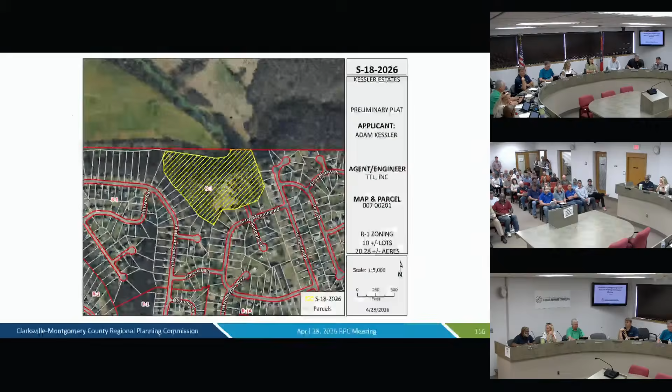Our first case on the consent agenda is case number S18, 2026. The request is for preliminary plat approval of Kessler Estates Cluster. The zoning is R1, 10 lots are proposed, and the recommendation is for deferral.

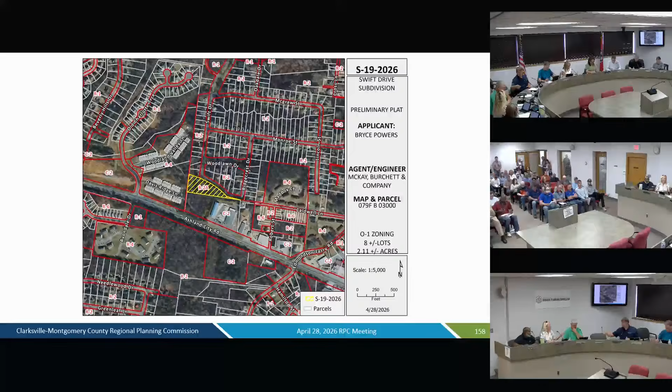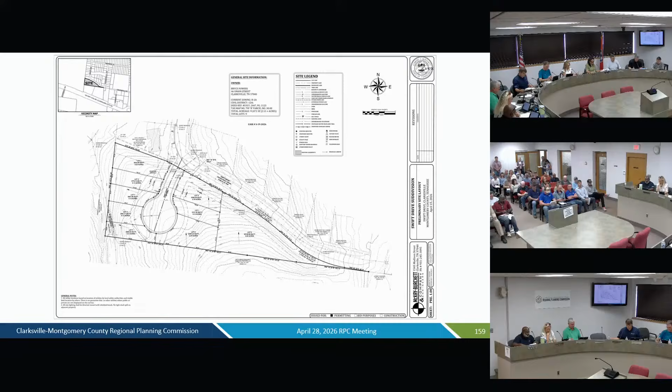Case number S19, 2026. The request is for preliminary plat approval of Swift Drive subdivision. The zoning is O-1, 8 lots proposed, and the staff recommendation is for approval subject to the conditions listed. Case number S20, 2026. The request is for preliminary plat approval of Gold Landing, Section 2. The property is zoned R3, and the number of proposed lots is 69. Staff recommendation is for approval subject to the conditions listed.

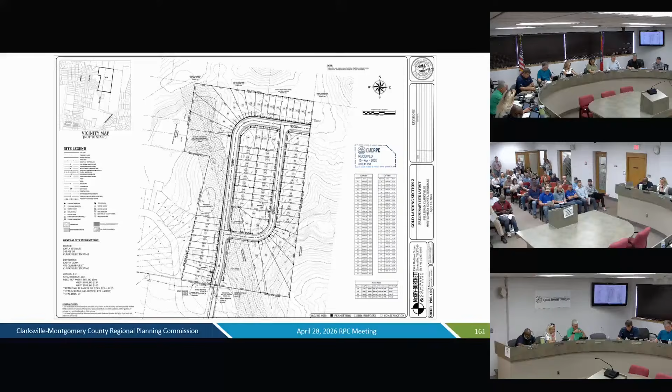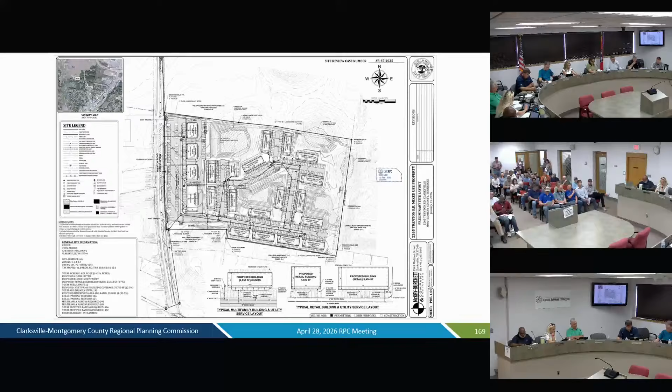Case number SR 87, 2025. The development's 2265 Trenton Road mixed use. The zoning is C5. The proposed use is retail and multifamily, and the recommendation is for deferral. Case number SR 9, 2026, Banner at Ajax. The proposed use is apartments. The zoning is R4, and the recommendation is for deferral.

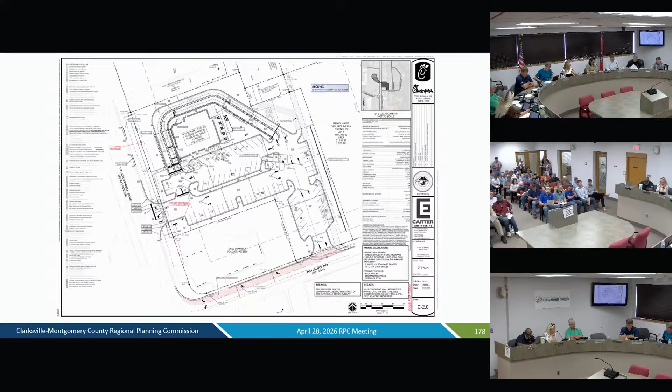Case number SR 11, 2026, the development is CFA 06163 Fort Campbell. The proposed use is commercial restaurant. The zoning is C5, and the staff recommendation is for approval subject to the conditions listed. Case number SR 30. The development's called 1662 Golf Club Lane. The proposed use is professional office. Zoning is OP office, and the staff recommendation is for approval subject to the conditions listed.

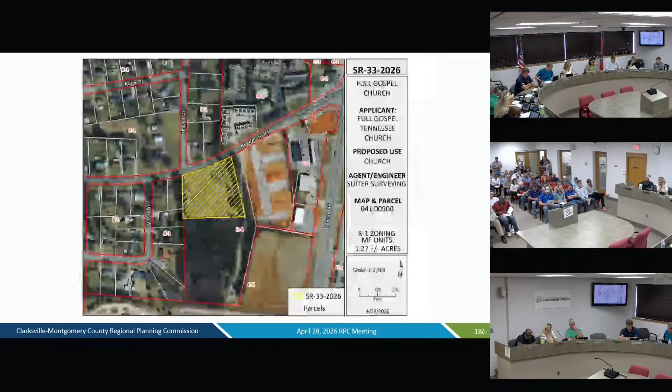Case number SR 33, 2026. Development is Full Gospel Church. Zoning is R1. Staff recommendation is for approval subject to the conditions listed. Case number SR 34, 2026. The development is Black Dog Storage. Proposed use is warehouse. C2 commercial is the zoning, and the staff recommendation is for approval, subject to the conditions listed.

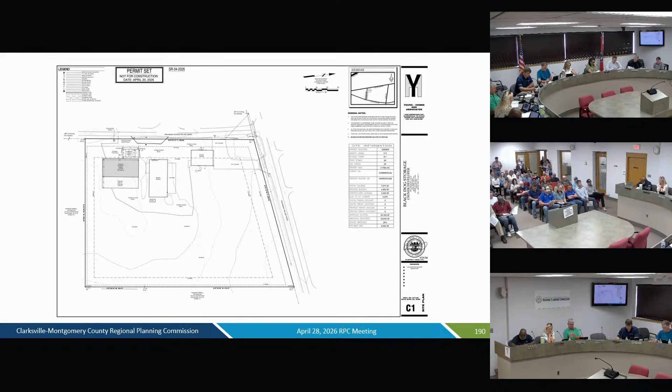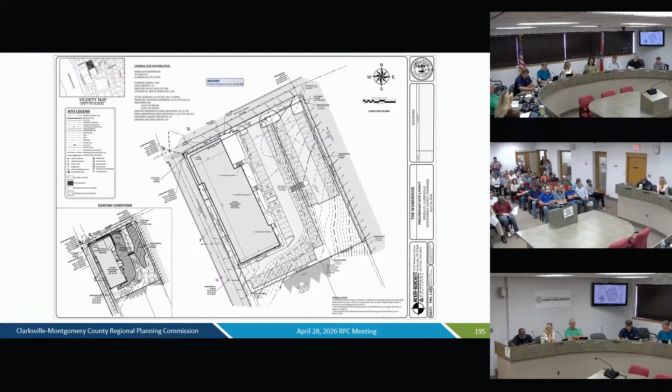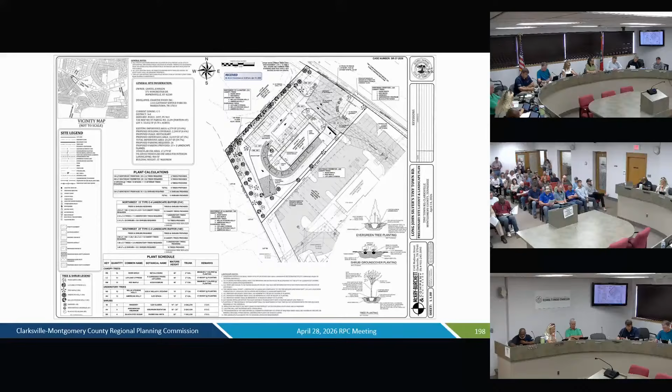Case number SR 36, 2026. Development is called the warehouse. The proposed use is retail and office. The zoning is CBD, Central Business District. Staff recommendation is for approval, subject to the conditions listed. Case number SR 37, 2026. The development is called Long John Silver's, Tiny Town Road. Proposed use is restaurant. Zoning is C5, highway, arterial, and commercial. Staff recommendation is for approval, subject to the conditions listed.

SR 38, 2026. The development is CarMax, Clarksville. The proposed use is used auto sales. Zoning is C5, highway and arterial commercial. Staff recommendation is for approval, subject to the conditions listed.

Case number SR 39, 2026. Development is McCoy Group, Clarksville. The proposed use is heavy equipment dealer, zoned C5. Staff recommendation is for approval, subject to the conditions listed.

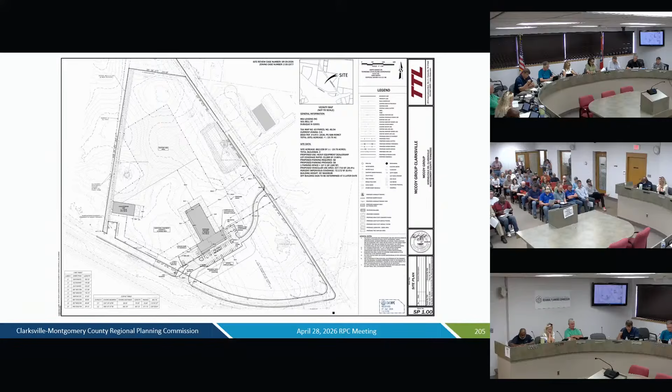Finally, case number SR 40, 2026. The development is River Road Commercial. Proposed use is a contractor's building, zoned C2, general commercial district. Staff recommendation is for approval, subject to the conditions listed.

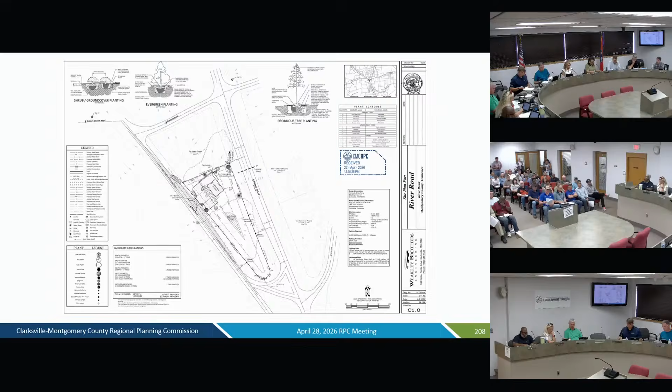Thank you. All right, commissioners, you heard the list of items. Do any of you need to remove any of those from the consent agenda?

Is there anyone from the public who needs to remove any of these from the consent agenda for individual hearings? Show of hands. All right, Madam Chairman, we'll consider the consent agenda as read, and we'll just need a motion on the consent agenda.

Do we have a motion? I make a motion for approval on the consent agenda with the conditions proposed. Second. I have a motion properly seconded. All in favor? Aye. All right, that motion has passed.

Believe that. That's good stuff.

This is where you read your little zoning. So I'm going to go ahead and give some preemptive remarks.

This portion of the agenda is for zone change applications. We will conduct the hearing for the remaining cases today on the agenda. For each of the cases, we'll allow up to 3 speakers to speak in favor and 3 speakers to speak against or oppose, and each will have 3 minutes. Then there will be an opportunity for rebuttal if necessary, also for 3 minutes.

Please keep in mind, any votes today are on the zoning commission's zoning applications, or for recommendations. If you want to follow through with the recommendations we send, please go to the city council or county commissioner meetings that I stated earlier, so you can follow through with your application and see if there's any changes there. But we are just the recommendations. So thank you for your patience with us.

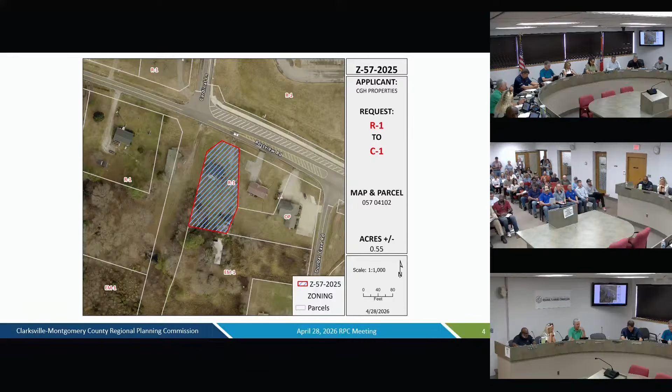It is in the St. Bethlehem planning area. And the reason for the request, as stated by the applicant, is rezoning this lot for neighborhood commercial to serve neighborhood and nearby residents.

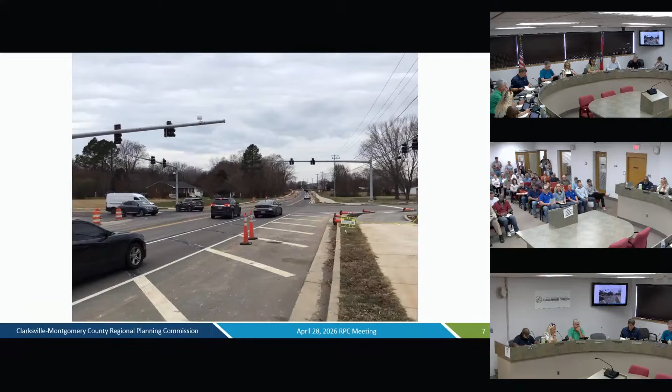You'll see the department comments received in reference to this application. They've stated no gravity sewers available, would be force main only. The city street department stated it's below the threshold for a traffic assessment, and the access would be determined by ordinance, which is one access on Dunbar Cave Road.

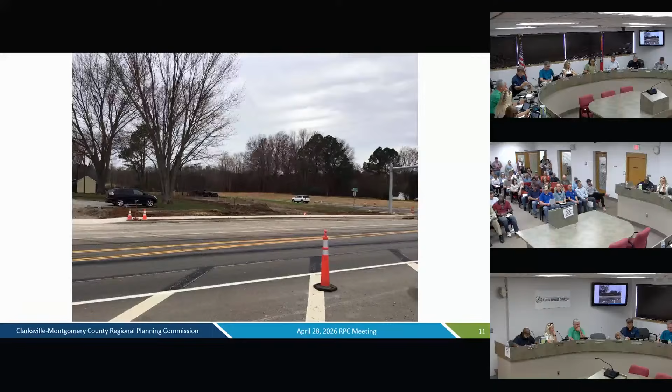I see no other department comments of any specific concern. The request, as stated, is in the St. Bethlehem planning area. Future land use is neighborhood commercial.

The staff's recommendation is for approval. The request is consistent with the overall goals and objectives of the adopted Clarksville-Montgomery County Comprehensive Plan. The parcel is designated neighborhood commercial on the adopted land use opinion map. This designation is intended to serve surrounding residents by providing small-scale neighborhood-oriented goods and services, and the proposed C1 neighborhood commercial zoning designation aligns with the future land use designation identified for this parcel.

You have 2 zoning maps showing the aerials and the zoomed-in copy of the property in question. You have a future land use opinion map and the current zoning for the area.

You do have some comments that were received in reference to this application. They're shown there on page 9 and 10, I believe. If this is familiar to you, this was here roughly 3 months ago, originally proposed as R3, and it was remanded back at the city council to consider a different zone, and at this point in time, the applicant has changed to C1.

So if you have any questions for myself or the staff, I'll be more than happy to try to answer them for you. Are there any questions? Okay, do we have anybody in the audience that supports this zoning?

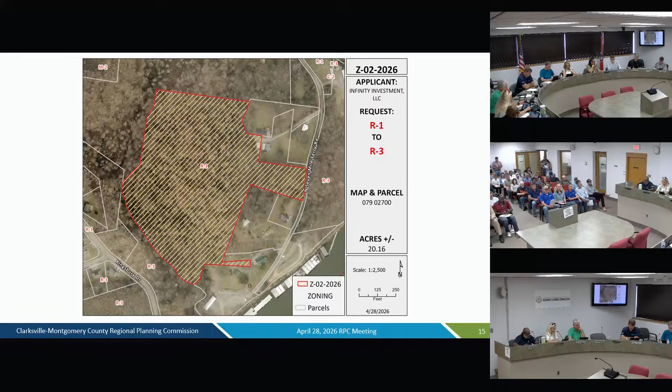Commissioners, your next application is Z2 2026, the application of Infinity Investments LLC. The request is to go from R1 Single Family Residential to R3 Three Family Residential for a property located on the western frontage of 7 Mile Ferry Road, approximately 1,450 feet south of the intersection with Pumping Station Road. It's a tract with areas of steep to moderate topography, currently wooded, and is in the South Clarksville planning area.

The applicant's statement for proposed use is to provide affordable housing on this property. The extra density would help with some topographical challenges and would be an extension of the existing R3 zones immediately east and west of this lot, connecting the two R3 areas. Again, that's the applicant's statement.

Department comments have stated there's no gravity sewer and a possible off-site lift station upgrade would be required. The Clarksville Street Department indicated a traffic assessment was required due to the proposed zoning acreage, and it was received and in compliance with the traffic study guidelines. The report is available for additional details. The impact would be increased residential density.

Residential development estimates by the applicant is 74 units. Historic is 100 units. That historic yield is likely high due to the topography. Again, it is in the South Clarksville planning area. Future land use designation is suburban neighborhood, and as previously presented, the staff's recommendation is for disapproval.

This request is inconsistent with the overall goals and objectives of the adopted Clarksville-Montgomery County Comprehensive Plan. The future land use opinion map designates these parcels as suburban neighborhood. Large areas of R3 moderate density residential within this designation do not fully reflect the intended development pattern for the area. The South Clarksville planning area and growth and development framework section of the Comprehensive Plan discourage development on steep slopes due to increased risk of erosion, higher construction costs, and other safety factors.

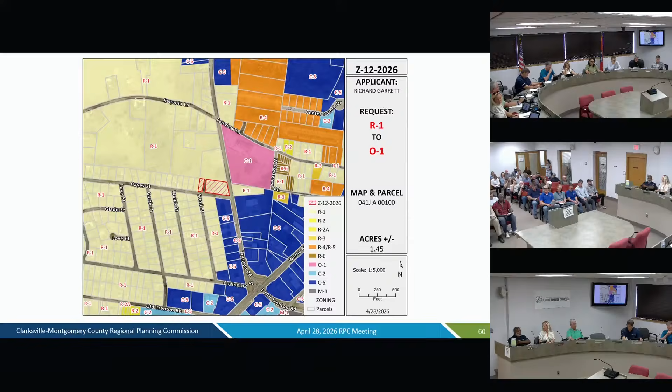The proposed O1 zone is intended to provide a limited office-only use that is compatible with the surrounding development patterns while minimizing impacts related to traffic, drainage, flooding, and infrastructure. Again, those are the comments of the reason for the request by the applicant.

The department comments: Utility has stated possible off-site lift station upgrades required. The street department has stated no future connection to Trenton Road, and a drainage plan may be required at the development stage.

The impact of the proposed use on the surrounding development: O1 provides an opportunity for general professional business offices of various scales and levels of intensity. It is accessible from Hayes Street. I did mention the karst topography.

There is a sinkhole immediately adjacent to this site. It is in the St. Bethlehem planning area, and the future land use designation is urban neighborhood.

Staff has recommended approval. The reasoning for this request is the proposed O1 office district aligns with the future land use designation of urban neighborhood, which states that limited office and commercial uses primarily located on major roads are appropriate, according to the adopted Clarksville-Montgomery County Comprehensive Plan.

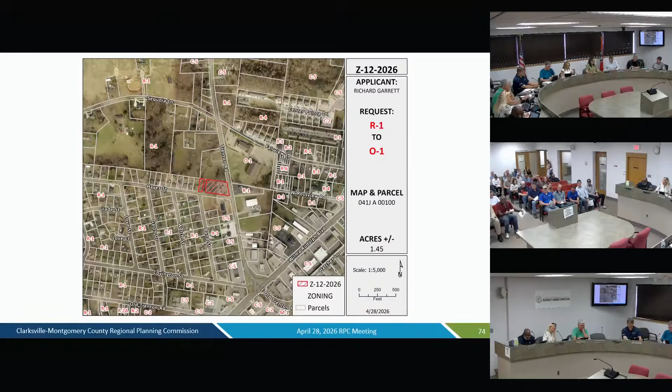Commissioners, on page 54 is your next application. Raul Lozano is the agent or the owner. The request is to go from RM1 single family mobile home residential district to R4 multiple family residential district. This is along the eastern frontage of Center Road, 180 plus or minus feet south of the intersection with Britton Springs Road. The reason stated by the applicant is to match the zoning across the street and it will be used for a multifamily residential structure. This request encompasses 0.35 plus or minus acres.

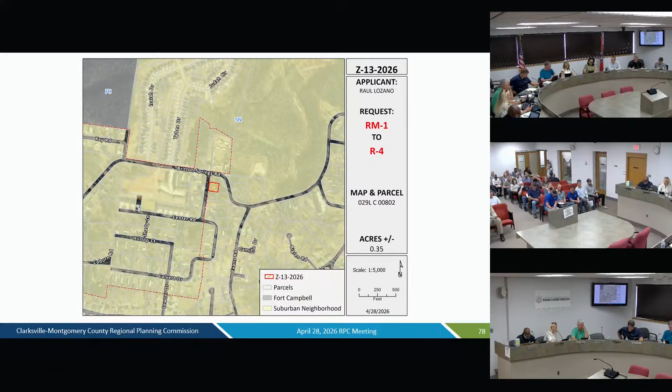It's an existing residential mobile home lot in the Lafayette Peters Mill Road planning area. There is previous zoning history in reference to this application. A year ago, both staff and the Planning Commission recommended approval of this application.

I believe it got first reading at City Council and was disapproved on the second reading. You have no department comments of any concern. The street department did indicate drainage and water quality may be required at site review. The impact would be increased multifamily residential density, accessible from Center Road. Total historic lot yield would be 4.

It is in the Lafayette Peters Mill planning area. There was also the Britton Springs neighborhood plan that was not adopted by City Council. Future land use map indicates suburban neighborhood. Staff recommendation is for approval.

The request is consistent with the overall goals and objectives of the adopted Clarksville-Montgomery County Comprehensive Plan. This parcel is shown as part of a suburban neighborhood future land use. While predominant use is moderate density single-family residential, this request is adjacent to a new multifamily residential development, replaces aging housing stock, and increases housing options in the planning area without negatively affecting the character of the area. It is encouraged to maintain a desirable mixture of housing stock for the planning area as well.

Your next two slides are the aerial overviews of the property in question. Then you have the future land use opinion map for this area, and the current zoning map. I do think it's relevant for the discussion. You'll see the dashed line — that is the location of the city limits boundary, and it does follow Center Road center line at this location. If you have any questions, I'll be more than happy to try to answer them.

Why City Council? Hit your button. I know, why'd City Council turn it down on the second reading?

I believe this was brought up when we were first discussing, after the first meeting of the Britton Springs Road neighborhood plan. Though it got through first reading by, I believe, a vote or two, it was pulled at second reading and it failed 7-6. So one or two council members changed their vote between first and second reading, possibly due to having some of those meetings and saying let's wait till the plan's done. Ultimately, as we know, the plan was not adopted, so the applicant decided to come back in and try again this year. And what was our vote on that, our commission vote?

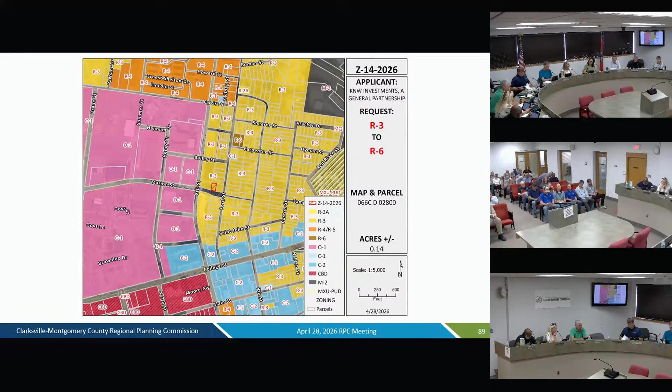All right, commissioners, on page 61 is your next application. It is Z14-2026, KNW Investments, a general partnership, requested to go from R3 three-family residential district to R6 single-family residential district. This is along the northern frontage of Marion Street, approximately 153 feet west of the intersection of Ford Street. The reason for the request stated by the applicant is to build two new houses on a currently vacant property, and that the request is in line with the Red River District Study. Again, those are the comments from the applicant as to why they're requesting this rezoning. This request encompasses 0.14 plus or minus acres.

It encompasses a former or existing single-family residential lot and a former alley that was abandoned. It is in the downtown urban core planning area. There were no department comments of any concern in reference to this application. The impact would be increased single-family residential density.

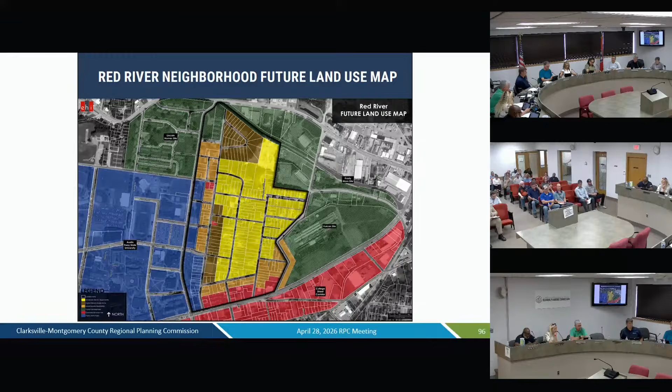Accessible by street frontage of Marion Street. The applicant's estimate and the historic estimate would be 2 lots. Again, this is in the downtown urban core planning area, the comprehensive plan, and a portion of the Red River neighborhood plan. Future land use designation is the comprehensive plan urban neighborhood and what is determined to be mixed density residential in the Red River neighborhood plan.

The staff is recommending approval. This request is consistent with the overall goals and objectives of the adopted Clarksville Montgomery County Comprehensive Plan and the Red River neighborhood plan. The R6 single-family residential request aligns with both the urban neighborhood and mixed residential future land use designations of the aforementioned plans. Small lot single-family residential development is identified as appropriate for this location by the adopted Red River neighborhood plan, and it is encouraged to maintain a desirable mixture of housing stock for the planning area.

You do have the 2 aerials of the property in question. Then you have a copy of the comprehensive plan future land use designation, the current zoning map designation. The Red River plan is on the screen, and the Red River neighborhood plan was in the online presentation or the screen presentation you have there. If you have any questions, I'll be more than happy to try to answer them.

Commissioners, do we have any questions? Okay, we're going to go ahead and move into public hearing. Do we have anybody for Z14 2026? Anybody against Z14 2026?

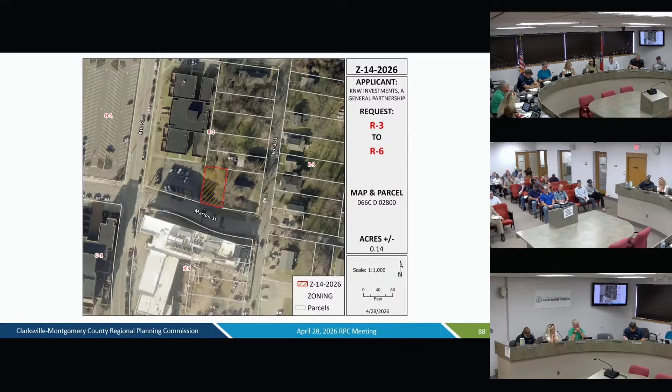I make a motion for approval due to the request being consistent with the overall goals and objectives of the adopted Clarksville-Montgomery County Comprehensive Plan and the Red River Neighborhood Plan.

I will add, if you have any questions, you're welcome to reach directly out to me. I'll be more than happy to answer anything and sit down with you and go over that survey. You're welcome. Thank you for being here today.

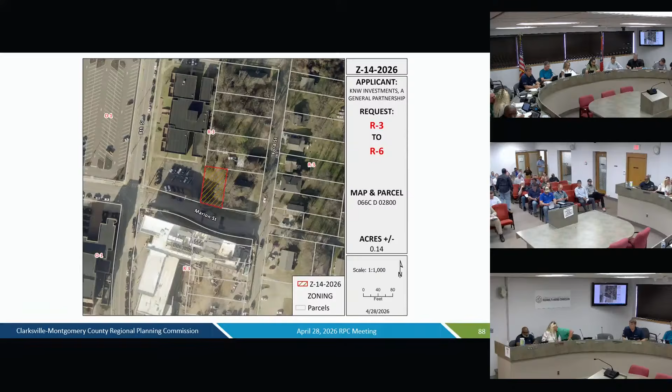Commissioners, your next application.

Please bear with me, I decided to scroll all the way back to the beginning, it appears. I hit the wrong bookmark, is what I did.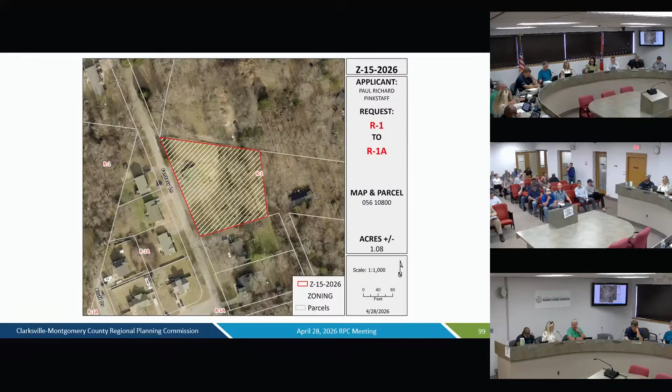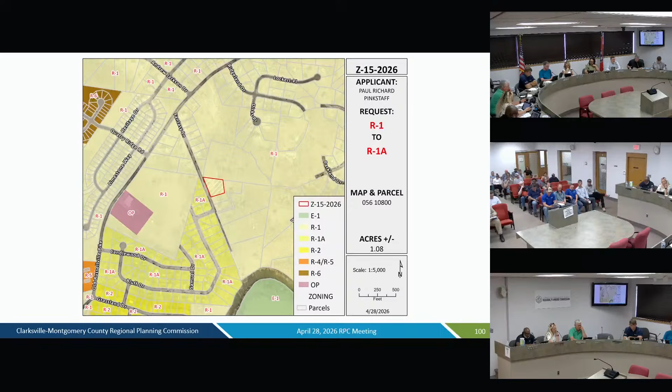All right, your next application is Z15-2026, starting on page 68 of your staff report. It is the owner, Paul Richard Pinkstaff, requesting to go from R1 Single Family Residential District to R1A Single Family Residential District. It's for a property that fronts on the east frontage of Fantasy Lane, approximately 325 feet north of the Fantasy Lane and Candlewood Drive intersection. The reason stated by the applicant is they're requesting R1A as an extension of the adjacent properties from the west. This property will also be used to build three single-family homes. Again, that's the comments of the applicant for this application.

This request encompasses just over an acre at 1.08 plus or minus. It's currently a single-family residential home site. It is in the St. Bethlehem planning area. This was originally requested a year ago from R1 to R3. Both staff and the RPC recommended disapproval, and the City Council did disapprove that application.

Department comments indicate possible water main upgrades required if a hydrant's required. CDE has denoted a property line that would need to be relocated or an easement given. You do have some school system comments, and the impact would be increased single-family residential density. The applicant's historic estimate and the historic estimate for that zoning classification is 3 lots. It is in the future land use map designation of suburban neighborhood.

The staff is recommending approval. This request is consistent with the overall goals and objectives of the adopted Clarksville-Montgomery County Comprehensive Plan. The R1A Single Family Residential District aligns with the suburban neighborhood designation identified for this tract, and the request is located in an appropriate location for a gradual increase in density that is in character with the development pattern for the area. The proposed R1A zoning classification is a gradual transition from the R1 standards of 15,000 square feet and 90-foot lot width to R1A's 12,000 square feet lot size and 80-foot lot width. These types of gradual increases align with the growth principles of the adopted Comprehensive Plan.

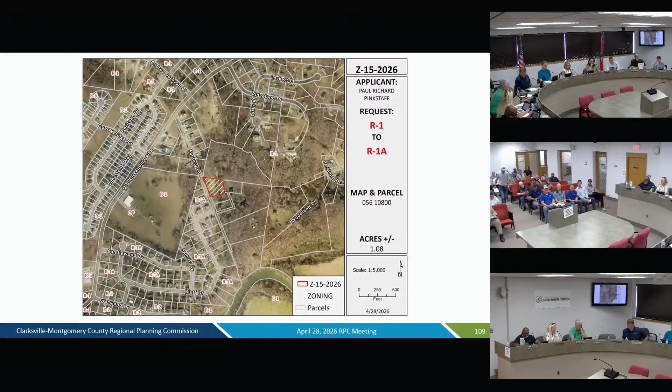Okay, we're going to go ahead and go into public session. Is there anyone who is for Z15-2026?

Please state your name and address. David Blessing, 895 South Ridge Trail. So what we're trying to do with this property is build 3 single-family homes. The current zoning allows for 3 single-family homes with a flag lot as well. But going from R1 to R1A allows for a narrower lot, going to an 80-foot lot, and allows me to align all three homes on the front setback to match the adjacent properties as well. That's all I have. If you have any questions?

Thank you. All righty, thank you Mr. Blessing. Is there anyone else for this zoning? Is there anybody here against it?

Yes, ma'am. When you come up, please state your name and address. Stephanie Fullerton, 456 Bluff Drive.

The rezoning request to go from R1 to R1A, the applicant is intending to place 3 separate single-family structures on one lot. While labeled as single-family, this functions as a multi-unit development in every practical sense. Fantasy Lane is a traditional single-family neighborhood, 1 home per lot. That pattern is consistent across the zoning map. Allowing 3 units on 1 parcel breaks that pattern and sets a precedent that will be impossible to contain. Once one lot is intensified, others will follow.

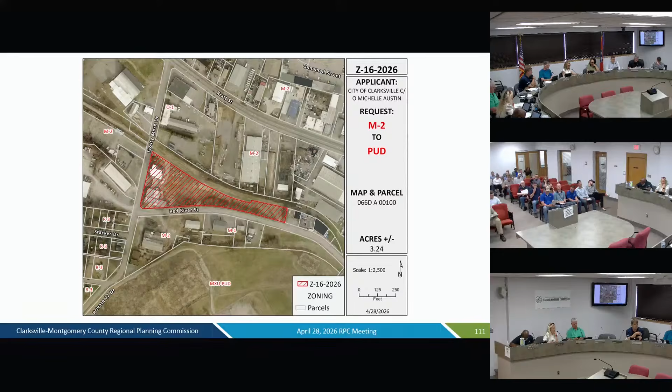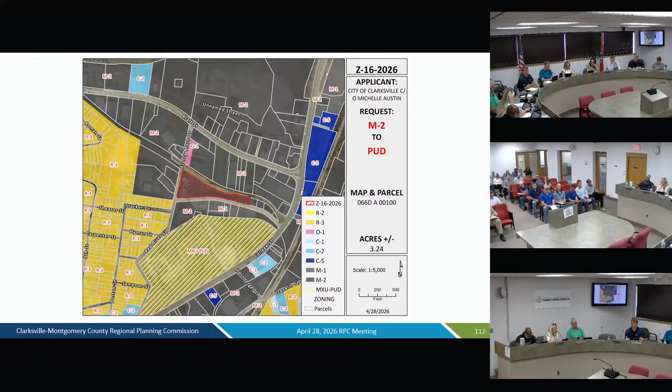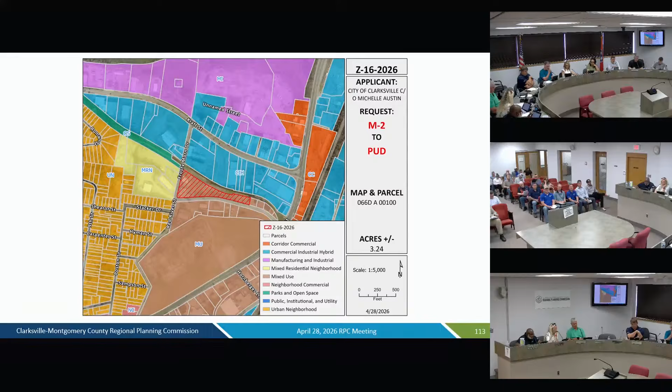This request does encompass 3.24 plus or minus acres. As you will see in the report, there is a detailed reason for this request as part of the PUD report, so I won't state it redundantly, but I'll go into the report for you. The request is right at 3 1/4 acres, currently zoned M2. This has been referred to many times over the years as the Frosty Morn site. It's a former industrial food processing facility currently in a state of disrepair. It is in the downtown urban core planning area.

Department comments: we do have pre-application meetings prior to these submittals. This has been met with all departments at the pre-application meeting, and then again the opportunity to provide the following comments. Street Department has indicated that drainage and water quality plans may be required. Dumpster tied to sewer and improvements to the storm sewer on Red River may be required.

Clarksville Fire Rescue indicated that the standpipe would be required for this project, and a future code-compliant hydrant location will be requested to serve the standpipe within 100 feet of the FDC, that's an acronym for Fire Department Connection. And then there were school system comments as well.

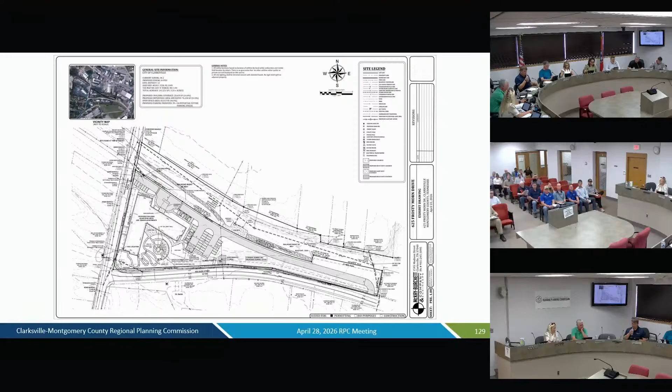All PUD applications, as a reminder, if this does receive approval at City Council, the Regional Planning Commission will have an additional opportunity to do a final PUD plan. I can tell you the comments referenced there will be addressed at that point in time. And actually, the site plan has already been updated to accommodate the FDC location for the fire department.

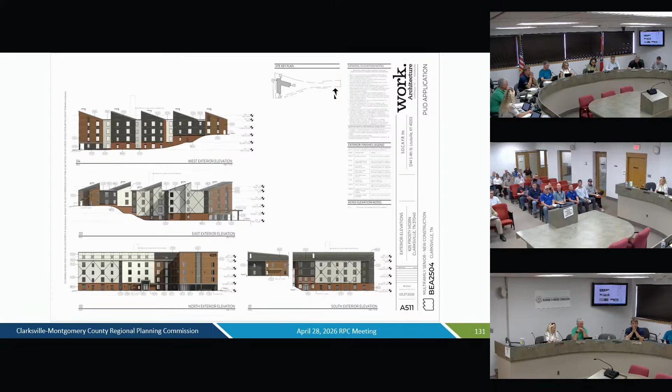There is no historical estimates in reference to this because it's specific to the plan that's been submitted. The applicant has indicated 65 units. Again, it is in the downtown urban core planning area. The future land use designation is for mixed use, and staff's recommendation is for approval of the preliminary PUD plan. You've got the aerial photographs, the future land use designation, the current zoning, and then your formal PUD report.

65 units was what was referenced a few moments ago. 49 of those would be one bedroom, 16 are two bedroom. The intent of the PUD application is stated there. As a reminder, the pre-application conference did take place on Thursday, March 19th at 1 p.m.

This overall plan is consistent with the comprehensive plan. The proposed PUD preliminary concept is consistent with the goals and objectives of the adopted Clarksville Montgomery County Comprehensive Plan. It meets all the following requirements that are shown there. It equates to right at 20 units per acre.

As far as transportation, a traffic impact study is stated as when it's required by ordinance. This application does not generate 100 peak hour trips. Senior adult housing, attached housing, averages for this specific development 13 a.m. peak hour trips and an average of 16 p.m. peak hour trips. Parking is attributed to the PUD specific use, which is age-restricted senior housing, falls within the 0.5 to 0.9 space per unit range per the accepted ITE parking generation.

Yeah, thank you. All right, commissioners, we do have two variance requests, so we'll ask you to open up your subdivision tab on your tablets. The first case is V2 2026, and I'll turn this over to Mr. Parker. Hey, thank you, Mr. Tyndall. We have case number V2 and V3 associated with the same subdivision, the same right-of-way dedication. If the commission prefers, we can do that as one case, one public hearing, or I can split those up into two, that's up to the board. Did you all hear that? Yes. Okay, are y'all in agreement to do them both together? I think that's what the yes was for.

Okay, case number V2 and V3 we'll discuss at the same time and have one public hearing. The applicant is American Snuff.

This is a subdivision variance request. The property is located south of and adjacent to Guthrie Highway, approximately 1,140 feet south and west of the intersection of Clear Springs Road and Guthrie Highway. Approximately 7.88 acres, zoned M2, and it is in the rural area of the growth plan.

I'll read the variances. There are a total of 3 with these two variance cases. The first is to section 4.113 subsection 1 and table 4.1 of the subdivision regulations, which states all subdivisions shall install curb and gutter as specified in city and/or county street road specifications. The request is to have no curb and gutter added to the proposed right-of-way.

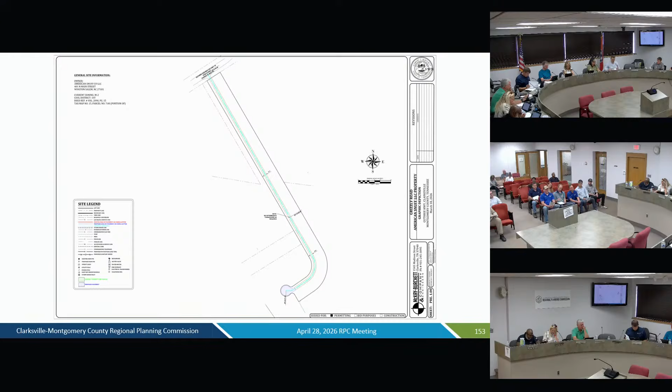Thank you, Commissioners. Our next variance case is case number V4 2026. The applicant is Paul Collins. The associated subdivision is Collins Way Private Residential Common Access Easement.

Yeah, we did them together. We considered them together, without objection. Yep, that's fine. I think we stated it before the public hearing, so I think we were in the clear there. That was where I was concerned. Thank you. Okay.

Case number V4, applicant Paul Collins. Again, the associated subdivision is Collins Way Private Residential Common Access Easement, case number S22 2026. The location is along the western frontage of Dotsonville Road, approximately 1,600 feet south of its intersection with York Road. The property is zoned Ag, Agricultural District. It is in the urban growth boundary of the growth plan, and the corresponding case is S22 2026.

The variance requested is to 3.210 subsection 2. The residential common access easement shall not exceed 750 feet in length. The request is to have a common access easement that is approximately 1,371 feet. On page 32, you'll see the aerial overview of the site. The following page is the variance exhibit. The next page is an engineering exhibit provided by the engineer indicating that it meets the required specifications.

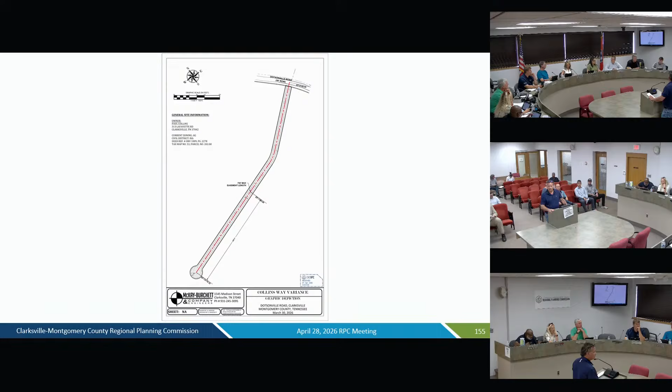Cal McKay, McKay Burchett Company, Engineers, 1545 Madison Street. Can you pull up the latest plat? In working through this, I wanted to further explain that County Fire had a problem with the length and the cul-de-sac width, so we've added an intermediate cul-de-sac at the required width of 750 feet and made it a normal cul-de-sac width as well as the cul-de-sac at the end, and it seemed to satisfy. It did satisfy County Fire, and I don't think any of the other departments had any objections.

Anybody have any questions for Mr. Burchett? It's McKay, I'm the other one. What did I just do? You got the Cals mixed up. That's all right. Probably a compliment. Well, you're both equally as handsome, so thank you so much. Thank you.

Y'all have anything? No worries, it's almost over, y'all. Okay, so are there any more questions or any more for this project?

Anyone against this project? Yes, ma'am. Please give your name and address. Howdy, my name is Christine McNamara. I live at 466 Christy Michelle Lane, which is off Dotsonville Road.

I know that a big issue with this development when it was in County Commission not long ago is that Liberty Elementary, which is right there off Dover Road and where my kids are zoned, is already at 105% capacity, not including any other rezones that have been done recently. Another part is that I see there's also a request for preliminary plat approval for the 86 or almost 87 acres, which is the totality of the land owned by the Collins family.

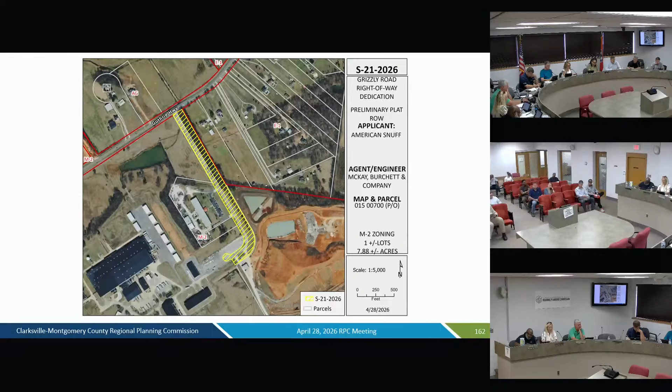Okay, moving into the subdivision section outside of the variances, our first case is case number S21-2026. This was for the previously approved V2 and V3 variances. Again, the applicant is American Snuff. The subdivision is the Grizzly Road right-of-way dedication. It is a preliminary plat located south of and adjacent to Guthrie Highway, approximately 1,140 feet south and west of the intersection of Clear Springs Road and Guthrie Highway, approximately 7.88 acres, and it is in the rural area of the growth plan. The staff recommendation is for approval subject to the conditions listed, and on page 38 and 39 you'll see the aerial overview and the proposed plat.

If there's any questions for the staff, I'll be happy to try and answer those. Okay, are there any questions? Okay, seeing there's no questions, let's go into public hearing. Anybody for S21-2026?

Cal McKay Burchett, 1545 Madison Street. Yes, sir, do you have any— McKay. How can I help you? Just if y'all have any questions.

Thank you. Anyone else? Anyone opposed? Okay, since there's no one else opposed, we'll go ahead and close this hearing and take it before the commissioners.

Make a motion for approval based on staff's recommendations. Second. We have a motion properly second. All in favor? Okay, motion is carried.

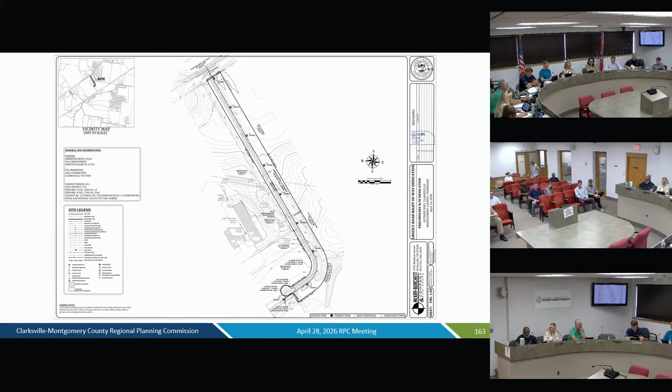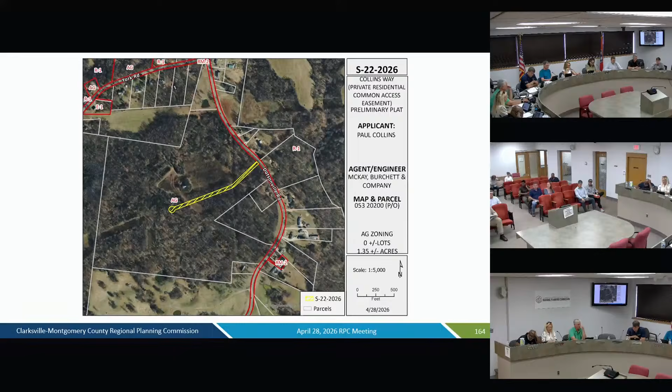Okay, our final subdivision case is case number S22-2026. The applicant again is Paul Collins. This was the previously approved V4 2026. The subdivision is Collins Way, private residential common access easement, preliminary plat. Again, located along the western frontage of Dotsonville Road, approximately 1,600 feet south of its intersection with York Road, zoned ag, and in the UGB portion of the growth plan.

Staff recommendation is for approval, subject to the 3 conditions listed. And beginning on page 42, you'll see the aerial overview of the site, and 43 is the proposed subdivision plat. If there's any questions, I'll be happy to try and answer those.

Do you have any questions for Mr. Parker? Seeing that there's none, we're going to go ahead and go into public session. Cal McKay Burchett Company, 1545 Madison Street. Just if you got any questions. You did so good. Thank you.

Is there anybody opposing? Or is there anyone else in favor of? Is there anyone opposing? Okay, we're going to go ahead and close public hearing. Can I entertain a motion? Motion for approval. Thank you. Second. We have a motion properly second. All in favor? Motion is passed.

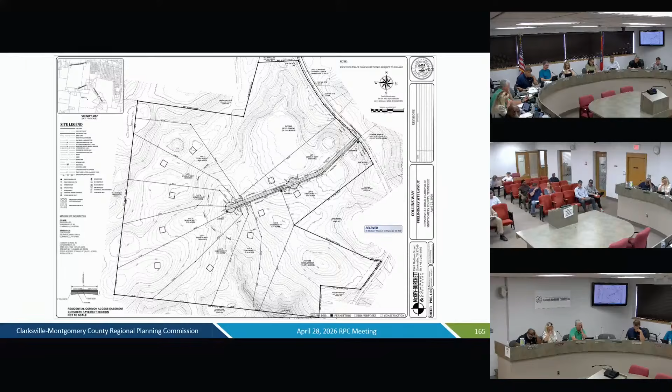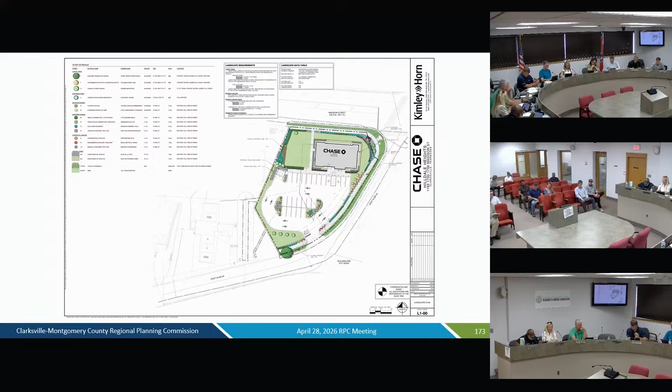Okay, moving into the site review portion of your agenda, case number SR2 2026. The applicant is Nick Madonia of Kimley Horn. The name of the site is Chase Bank, Hilldale Heights. The proposed use is a freestanding bank with ATM. Property is located at the southwest corner of Memorial Drive and Madison Street. It's extending south along Golf Club Lane, approximately 40 feet beyond its intersection with Old Ashland City Road. The acreage is approximately .75, zoned C2 commercial, and it is within the city.

On page 8, you'll see the aerial overview of the site. Pages 10 through 23 are the site and landscape plans, along with a few other extra pages. And finally, on page 24, you'll see a public comment that was presented. This was approved by the Common Design Review Board yesterday.

You can see the department comments listed below, and then the staff recommendation is for approval subject to the 4 conditions listed: approval of all utility plans by the city engineer's office; approval of all grading, drainage, and water quality plans by the city street department to include road and sidewalk improvements as required; minor plat completed and recorded; and finally, approval from CDE Light Band. Thank you.

Are there any questions? Okay, we'll go into public hearing. SR2 2026, is there anybody here in favor? Thank you. If you can give your name and address, please. Yeah, Nick Madonia, Kimley Horn, 10 Leah Avenue. Just if y'all have any questions.

Do we have any questions? Thank you. Thanks. Is there anyone else in favor of SR2 2026? Is there anyone opposed to SR2 2026? If not, we're going to go ahead and close public hearing. Entertain a motion. Second. Second. We have a motion properly second. All in favor? Aye. Motion carries.

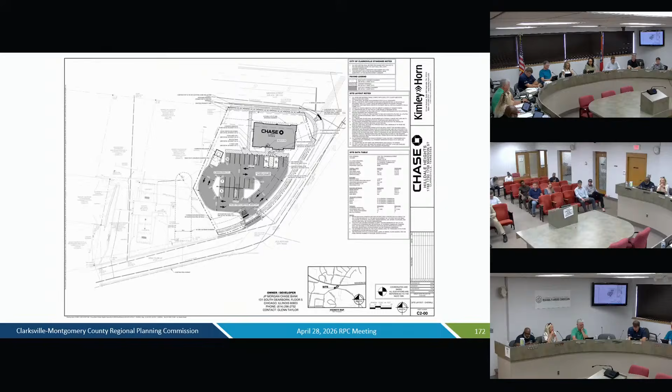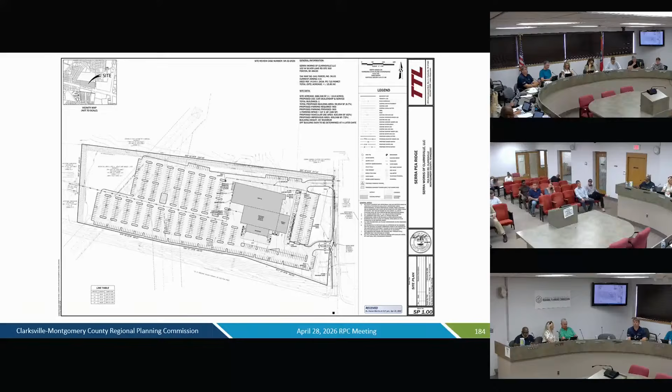Okay, thank you, commissioners. Our next case is case number SR32 2026. The applicant is Joe Serra. Name of site is Serra Pea Ridge. It is the proposed use as a car dealership. Property is located east of and adjacent to the terminus of Delray Drive, northwest of and adjacent to the intersection of 101st Airborne Division Parkway and Pea Ridge Road. It's approximately 15.80 acres. The zoning is C5 Highway and Arterial Commercial District and located within the city.

If you'll go to page 52, you'll see the aerial overview of the site. Page 53 is the proposed site plan, and 54 is the landscape plan. And on the following page is the public comment that we've received. The staff recommendation is for approval, subject to the following 4 conditions.

TVA right-of-way approval prior to final plat approval. Approval of all grading, drainage, and water quality plans by the city street department to include road and sidewalk improvements as required. In addition, the vehicle delivery entrance must meet adequate turning radius to accommodate truck ingress and egress as approved by the street department. Approval of all utility plans by the city engineer's office and utility district official. And finally, meet CDE requirements per CDE light band design at full cost to the developer.

Thank you, commissioners. I'll answer any questions if you have any. We have any questions? If not, we're going to go to public session. Is there anybody here to speak in favor of?

If you can give your name and address, please. Houston Smith with TTL, 2971 International Boulevard.

I'm going to probably defer and let the opposition speak so I can respond to those. But if it's about traffic, this site's coming out at the new traffic signal on 101st at Pea Ridge Road. We have a turn lane coming into the main entrance.

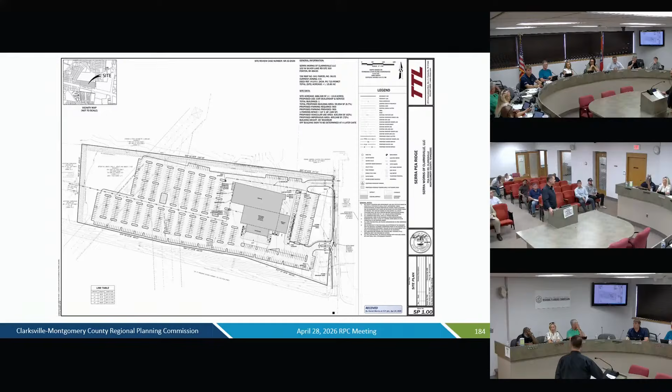Commissioner Streetman, if I may add, to avoid confusion, the current condition just states that the street department wants adequate radius and widening out there. I think when we make the motion here, you should clarify that widening is to a minimum of 24 foot per street department approval. That will clarify the motion for the floor.

Okay, that works. And Mr. Smith, just so you're aware, I know you're not usually here at these. Sure, anytime one of our council members comes up, I know they're speaking on behalf of their area, and as the city council appointee, I always try to really listen to them and be their voice. Absolutely, as their representative. I'm going to go see Mr. Tindall really quick on this. Thank you.

I think the hang-up was the word 'may'. It was the word 'may'. Okay, sure, no sweat. Is there any more questions for Mr. Smith? Okay, any more comments? Okay, I'll entertain a motion.

I'll make a motion for approval with the updated condition. If you could repeat that for me, please, sir. The proper motion would be to make a motion subject to the staff's recommendation and to require improvement of a minimum of 12-foot travel lanes on Pea Ridge Road. Okay, thank you. Have a motion? Second. Have a motion properly seconded. All in favor? Aye. Okay, motion passed.

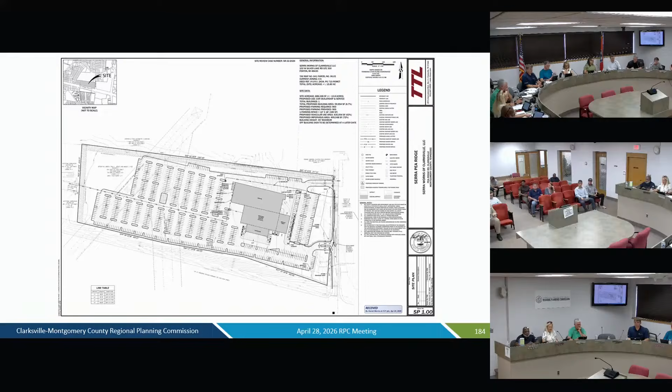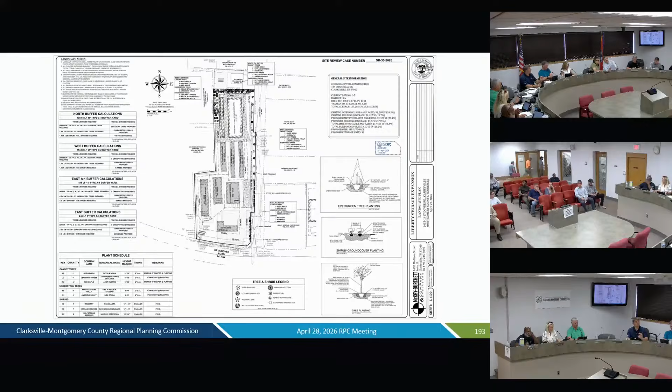Case number SR 35 2026. The applicant is Chris Blackwell. The name of the site is Liberty Storage Expansion, a proposed self-storage expansion. The property is located at the northwest corner of the intersection of Dover Road and Butts Drive. The property is zoned C5, Highway Arterial Commercial, and it is in the UGB portion of the growth plan. On page 68 you'll see the aerial overview of the site, page 69 is the site plan, and page 70 is the landscape plan. On pages 71 through 81 you'll see several public comments received, and we can allow the commissioners a couple of minutes to look over that if you'd prefer.

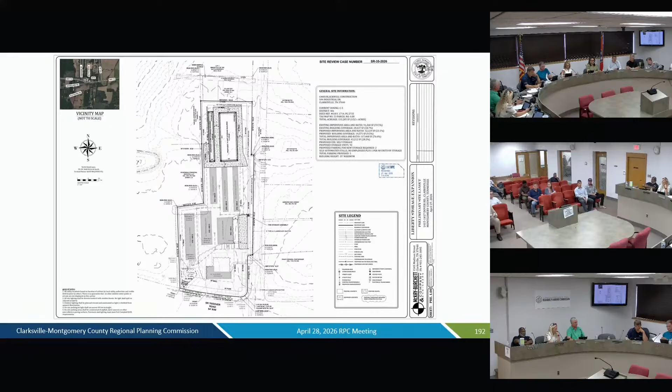Okay, are there any questions for Fred? If not, we're going to go ahead and move into public hearing. Thank you. We're going to move into public hearing.

Cal McKay, Burchett Company, 2545 Madison Street. Not sure what the objections are, but this site was fully approved back in 2022, I think, through all the departments and Planning Commission for site plan approval for 3 buildings. We're back here asking for approval again because all of his approvals expired, and he's got a different layout. We've got 2 buildings now, but roughly around the same amount of square footage. But I'll be happy to answer any questions.

Anybody have any questions? Okay, do we have anybody else in favor of this, SR 35? Chris Blackwell's here, the owner, if y'all have any questions for him. Okay. Anybody else in agreement with SR 35 2026? Anybody oppose SR 35 2026? Okay.

My name is Bo Jensen. I live at 838 Butts Drive. My main concerns, I have 3 main concerns.

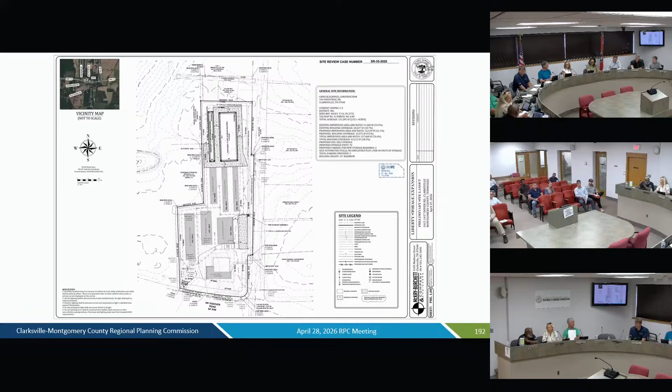All right, Commissioners, a couple other pieces of other business, some things we don't often do here. The first up is the extension request for the Black Oaks PUD Z50 2023.

Oh sorry, we've got something on the floor. Without objection, because I have another meeting I need to get to, could we move item F to the top part of this agenda? Absolutely, we're getting a little close to the Finance Committee, aren't we? Yep. Chairwoman, without objection. Without objection. Okay, let's go to item F on your agenda.

There is to initiate a city zoning ordinance change with regard to vape shops and tobacco stores, and add conditions to such uses. There's been some discussion with Council Member Streetman as a city council member and myself about how to do this properly through the city code. After talking to the city attorney's office, they felt being in the zoning ordinance is the appropriate place.

This is something we can bring back next month, just update the use chart. Right now it's just under tobacco stores in general. We'll add a couple conditions, similar to liquor stores, on distances to different uses and from each other. So we'll bring it back in an ordinance package next month, but we will have to have someone make a motion to initiate it. You can all discuss it and then approve it to start that process. And also it was to, as we discussed, potentially change the zoning categories it can currently go into.

I make a motion to initiate a city zoning ordinance change with regard to vape shops / tobacco stores and add conditions to such uses.

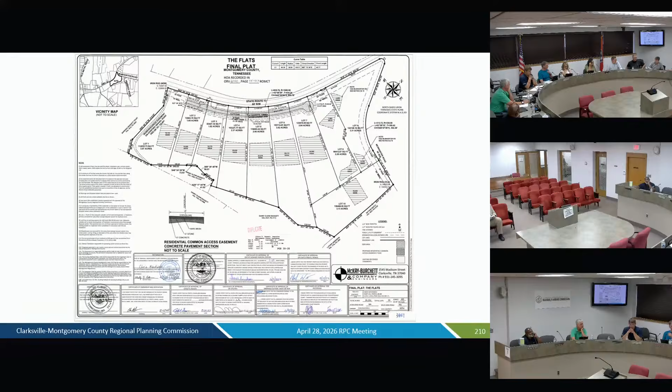Okay, next is a bond release, letter D, the Flats, S109 2021. Mr. Parker, in the interest of time, is this our last bond that we're holding? Yes, for an alleyway on the Flats. There's the picture, everything's been installed. We have the letter from the engineer. It formally has to be released by the planning commission.

Just need a motion for release. Make a motion for release. Have a second? Second. All in favor? Aye. Motion's passed.

And then we did defer the budget. We did not have a quorum for the executive meeting yesterday, so we will hear the budget next month. Besides that, public comments?